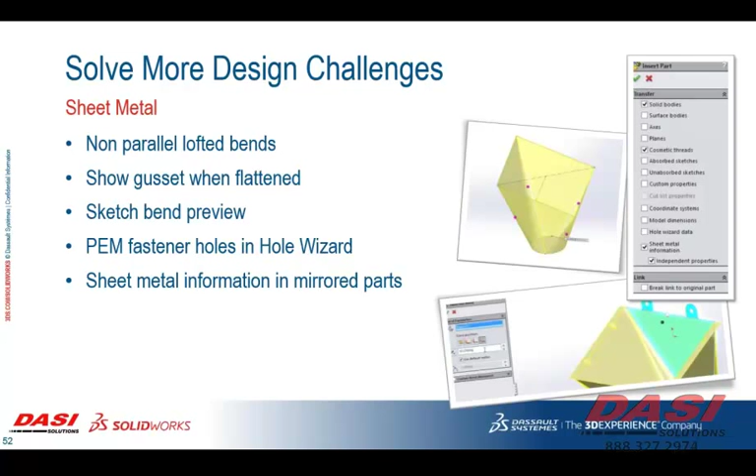We are going to cover a little bit with sheet metal. There is not a ton of things with this, but the things that are there definitely have a lot of capabilities. So first thing I want to get into is an older limitation which is now completely addressed.

That had to do with any lofted sheet metal component. We've had the capabilities to make these freeform shapes based on 2 sketches for quite some time. This is a classic example of rectangular to circular, a duct narrowing or a transition. We've never had the ability, however, to use sketches that were non-parallel, which this example is showing us.

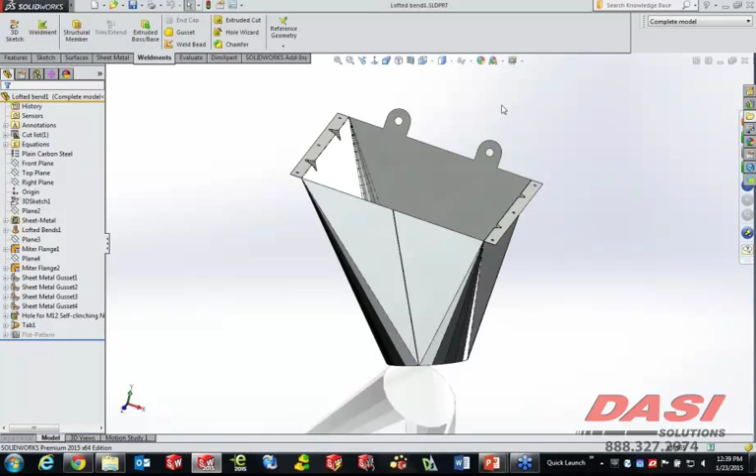If I go back to the raw version of this, you can see I have 2 sketches on planes that are obviously not parallel to each other. When you select your sheet metal tools to do a lofted bend, we're using some prep methods here where we leave a gap, because of course you need the sheet metal part to be able to fold and unfold. But all we're doing is selecting these non-planar or parallel sketches, and as I select each of those, it's going to go ahead and give us the nice preview that we're looking for.

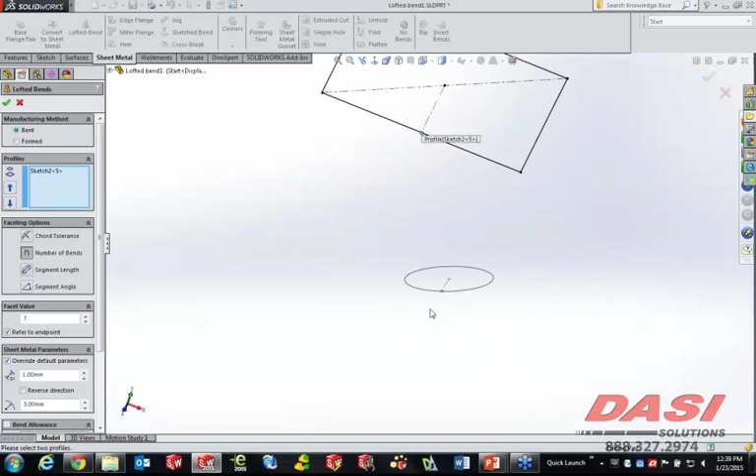Same thing I showed you on the weldments. Anywhere that you have these magenta dots allows you to change from the overall defining characteristics of how many facets, or the chord tolerance or length, and actually individually select those and modify them one at a time. So if I wanted to have many more facets in this corner than in the others, I could change that one up independent of the rest. It then turns blue to indicate it's no longer driven by the document's defaults.

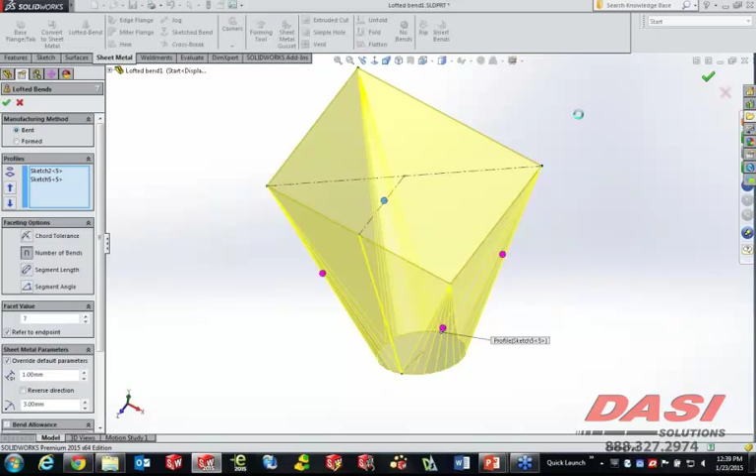As I say OK to this, you'll see the nice preview turns into a beautiful solid part. And then the flat pattern of that gives us what we need, which is the number of hits in the corner in order to go ahead and make this on a press brake or on a CNC brake. But non-planar profiles, or non-parallel, excuse me.

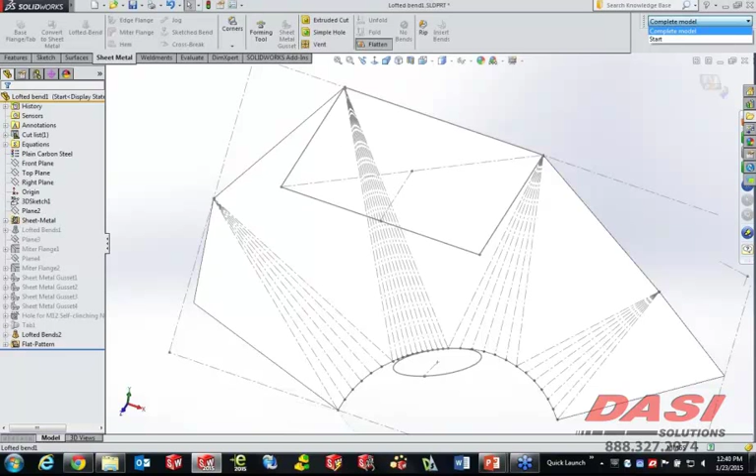Very nice. So let's switch back over to our completed component. A couple of things to note on this one. First of all, when you flatten a part like this, last year, 2014, we added a gusset feature to the SOLIDWORKS sheet metal components. When you flatten this, because a gusset by nature interferes with the bend, and on purpose in real life because that's going to give it strength, but as we flatten it, we need to remove it.

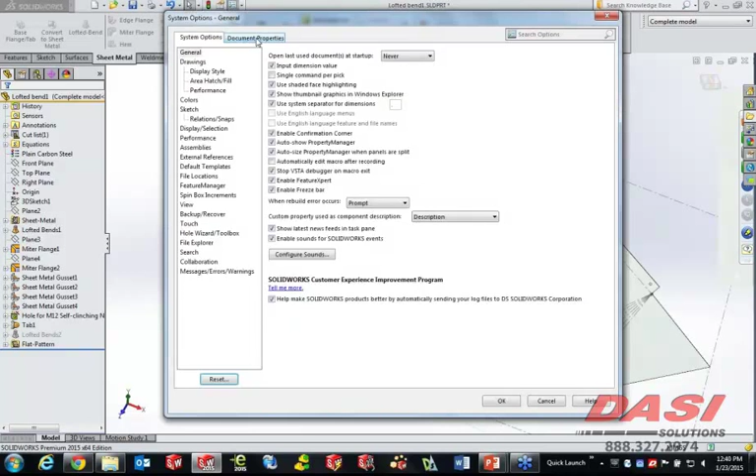So it's automatically put in the faces to exclude category of your flat pattern feature. However, when the flat pattern shows, we don't even know where it was. So under Tools and Options, there is a document property that lives with the file, with the title block, or with the document template if it's a sheet metal template for you. It's down here under sheet metal, and it simply says show sheet metal gusset profiles when flattened, and show their centers when flattened. As soon as I do this, what you're going to see is a sketch representing those gusset locations appear on my 3D flattened part.

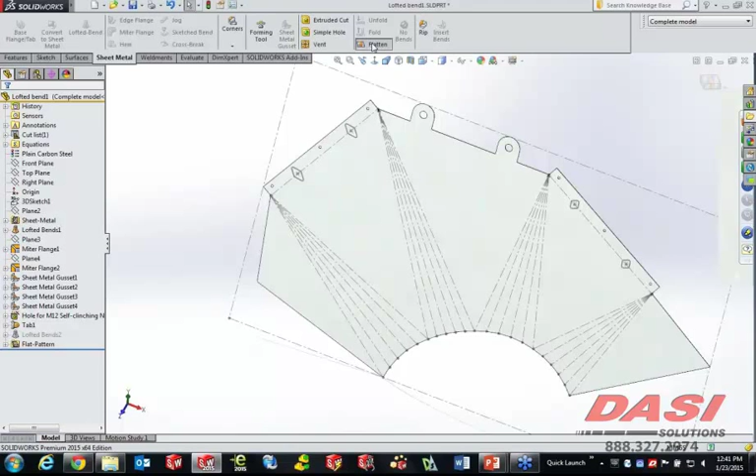Now, of course, when I uncheck flatten, it's going to remove that sketch and then show the 3D feature it is. But when it's in the flat pattern, that's got to be a keep out area. You can't interfere with where that gusset's going to go so that we don't accidentally punch a hole through it or put anything else directly adjacent to it.

Every sheet metal feature has also had a preview, except for the sketched bend. So the sketched bend now has that. Let me just run through it and show it to you.

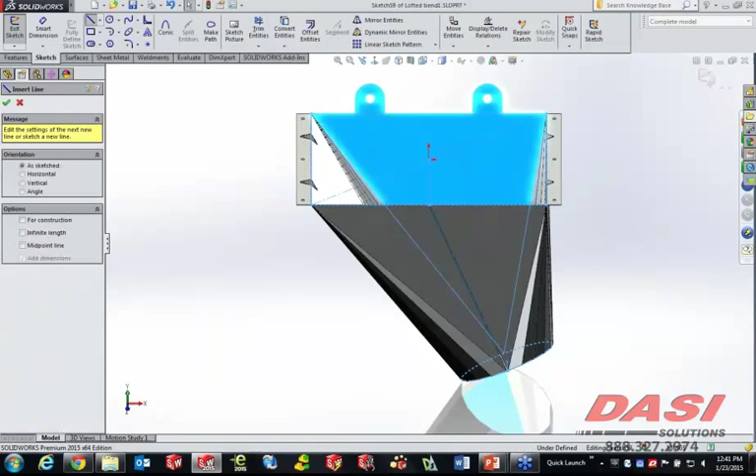As you sketch a bend, what you're essentially doing is taking either a pre-drawn sketch or drawing a new sketch, as I am in my case, and we're determining a bend that takes place around that edge. So as we go ahead and say OK to this line tool, it's going to complete the sketched bend by asking us for the fixed face, which will say this side's going to stay fixed. As that happens, you'll see the preview pop up, which it did not before. We'll go ahead and modify where the radius goes, the direction, and even the angle.

Just make that 65. All right, and that should be parallel to the rest of those faces based on the angle of attack of that other face. But a preview is going to let you know this before we say OK, which was a little frustrating before compared to the rest of the interface.

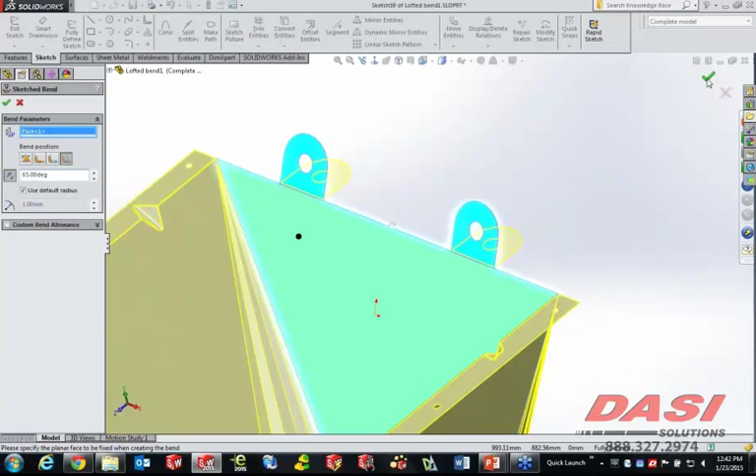Last thing I want to show you on this is the creation of a mirrored part from a sheet metal part. Now, sheet metal parts I consider somewhat unique to other geometry because they're really more of a living, breathing thing. They start as flat material, and then they are bent up in an order and a process to create these 3D bodies, which is more than just a milled part that you have a stock body sitting in your hand. So what happens with these when we try to use them in other places, and more particularly a mirrored, symmetric type of an assembly, is that we lose some of the behavior of that sheet metal resulting part. So SOLIDWORKS 2015 has addressed this.

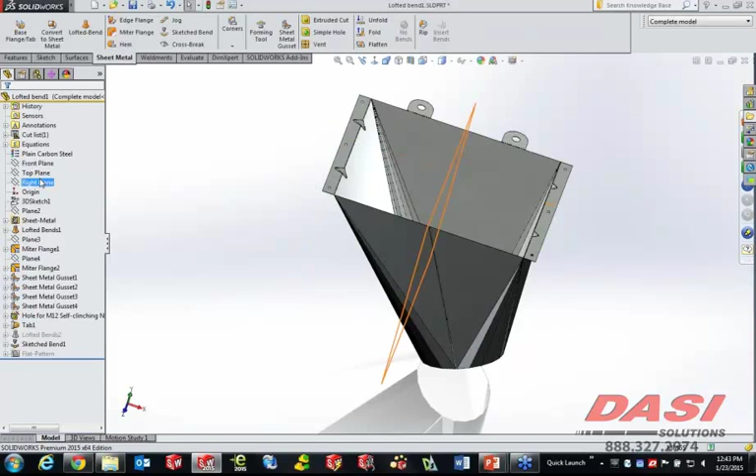What we do is we simply take the plane that we want to use to mirror this component. We're just going to use the right plane. And then we're just going to simply go on to Insert and Mirror Part. Now the choices we get over here are things like sheet metal information, which if I actually select each of these, that's going to transfer the sheet metal information of the part over to the new mirrored part. Now these sheet metal details include a lot of things.

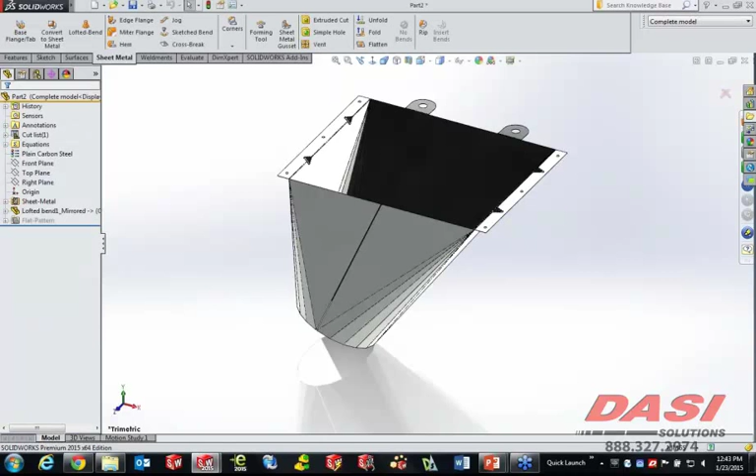It's actually the flat geometry, what faces we've deemed as fixed, the grain direction, so the way that this is going to sit on blank material, the faces to exclude, which will be the things from the gussets, as well as things like the bend lines and their parameters, any sketch transforms like the gussets and the flat pattern, and then the forming tool information. So basically the resulting mirrored part, though in reality it looks just like the original, simply the opposite, actually has all of the functional behavior of an original sheet metal part.

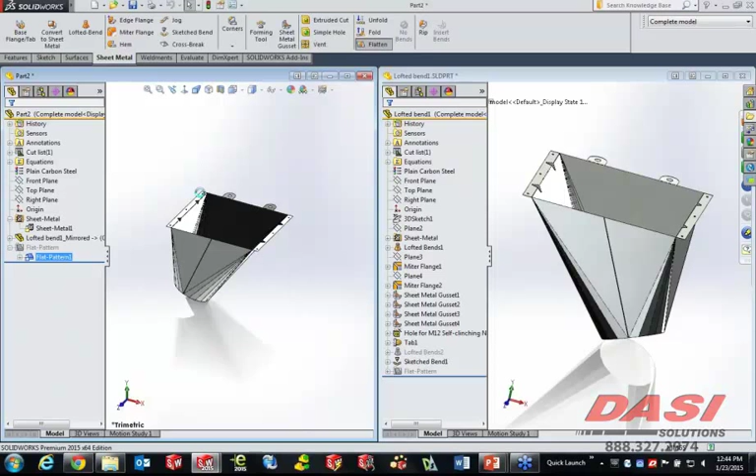So over here is my mirrored result. If we look at the sheet metal features, we see that we have a part, and then underneath that it's actually going to list out all of the individual bends. So we have each of those and the ability to take a look at those. But what we also get down here is the ability to see all the flat pattern features. And each of these bends also is going to have some associative information. As a result, if I click flatten on this part, we're going to see a beautiful flat pattern that's exactly the opposite of the one that I showed you prior to this.

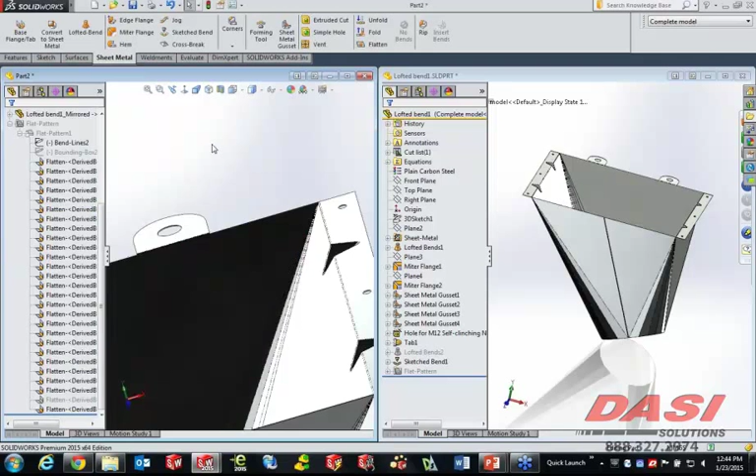And again, it has all the individual uniqueness so that we can do things like individually suppress and unsuppress bends. So anytime we're looking at this part here, there's a derived bend. We don't want derived bends for this particular one. We actually just want regular old bends. But that's going to give us some capabilities to take any one of these other bends here and simply suppress it. This one's got some interference on those. So essentially, the capabilities are there, and it's going to give you probably the most important part of this. Let's take that one back just so this doesn't change.

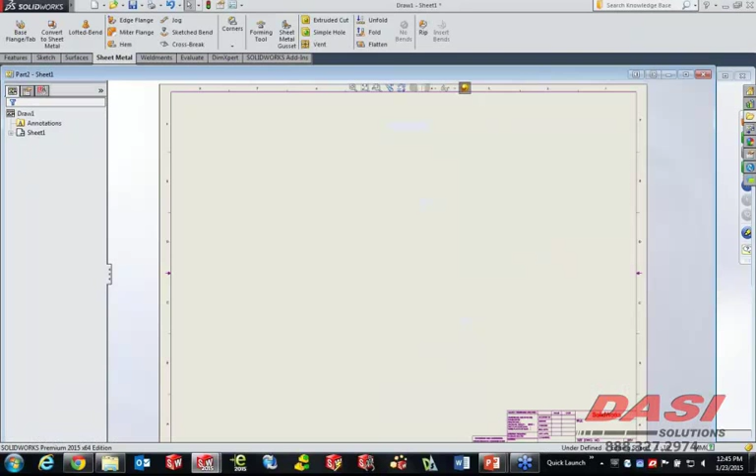But let me make a drawing from this resulting mirrored part. So the drawing from the resulting mirrored part auto-populates, but only if the sheet metal characteristics are there. So if I take a C-size piece of paper and we simply make a drawing of this mirrored sheet metal part, so our part 2, once my view palette pops out, I'll grab my flat pattern, but you'll be able to see right away that as the mirrored part shows, it has all of that intelligence of bend angle, direction, radius, and the unique individual criteria for each of those bends to be created.

So much more usable when it comes to saving yourself a lot of time by creating a mirrored part, but not losing the capabilities or the behavior of what a sheet metal part represents.